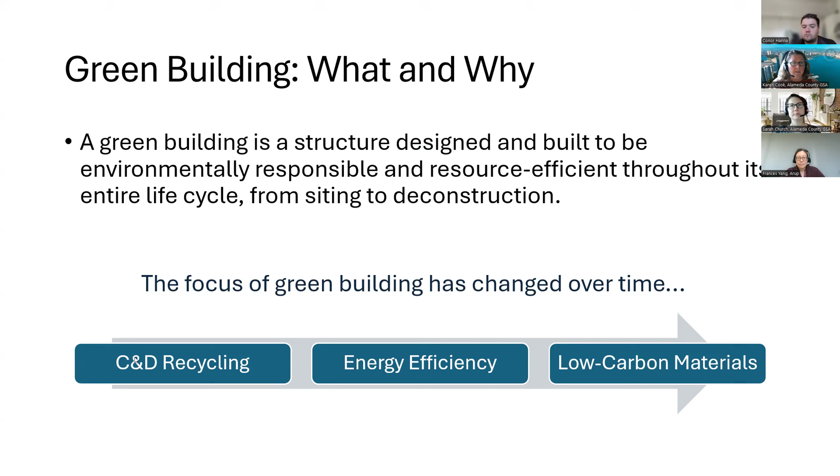We know that the green building industry is growing every year, and this is just one measure, but if we look at the number of projects being certified to LEED, which is a commonly used multi-attribute standard, we see it's growing year over year. We want to make sure the entire industry comes along with this work, and we hope that this supports you in doing that.

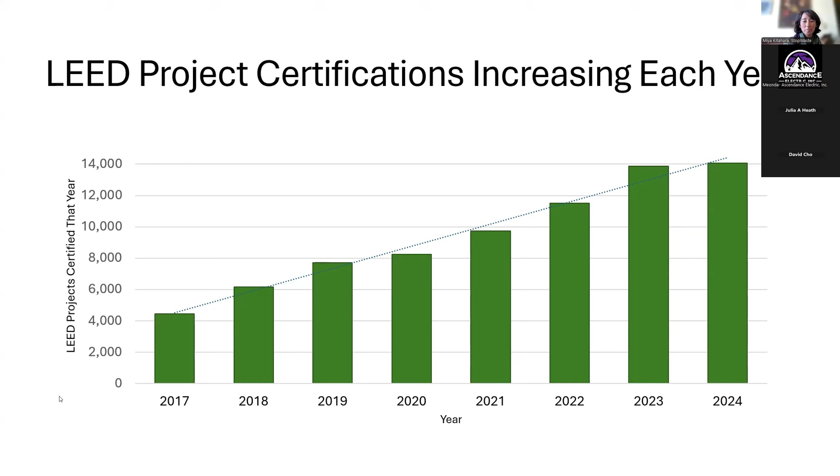As a government agency, it's really imperative that we act as leaders, as the impacts of climate change are harming our community, especially those that are most vulnerable. We've all experienced an increasing number of record high temperatures and record rainfall events in recent years, in addition to increased smoke pollution from wildfires nearby. These events not only affect our community, but they also may be affecting your business, your family, and your health.

Analysis from the Carbon Leadership Forum shows that building materials are a sizable part of the picture when it comes to contributing to climate change. Emissions from the building and infrastructure materials sectors comprise 17% of global greenhouse gas emissions.

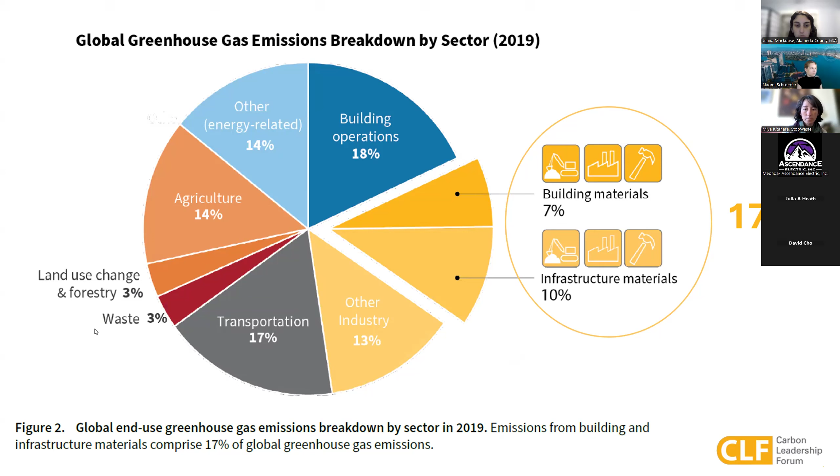In today's presentation, we're really going to focus on the low carbon material construction specification we're presenting, which addresses the emissions from the product and construction phase of the project.

But I do want to acknowledge that we're also working with Arup and StopWaste to draft a building material reuse specification that also addresses emissions from the same stages of the building life cycle. We're not going to cover that in today's presentation, but if this is of particular interest to you, please let us know, and we'd be happy to get your feedback on that as well.

So we are continuing in GSA to work on other projects that tackle energy efficiency, on-site renewables, and other green initiatives. But today's focus is really on these low carbon materials and getting your feedback so we can ensure we are meeting the needs of our local business community.

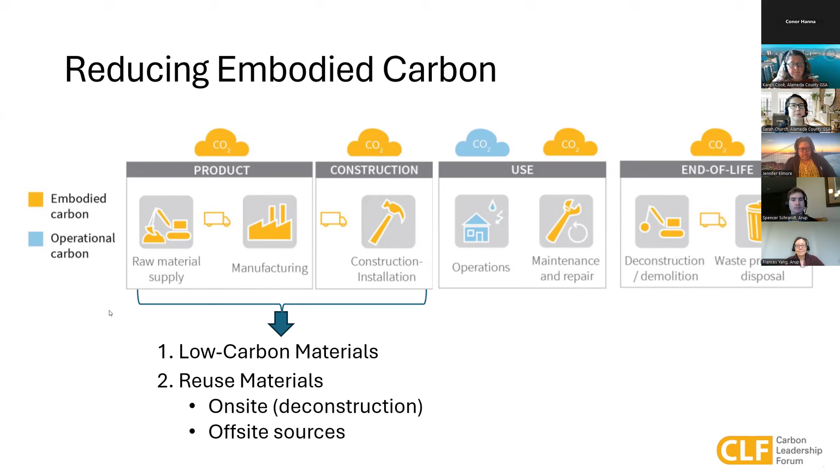Thank you, Karen, and thank you for joining everybody. Good morning. Yes, so I'm going to go into some of the more specifics with the low carbon materials performance specification, which would appear in the Division 1 specification, right alongside the more general sustainability requirements.

So you'll see asphalt, flat glass, and we'll clarify that a little more. CMU, concrete, both precast and cast-in-place. Different kinds of insulation, and these are categorized in their use, and we'll describe that a little more in terms of which types of insulation that really encompasses. And then sorts of steel products, as well as rebar.

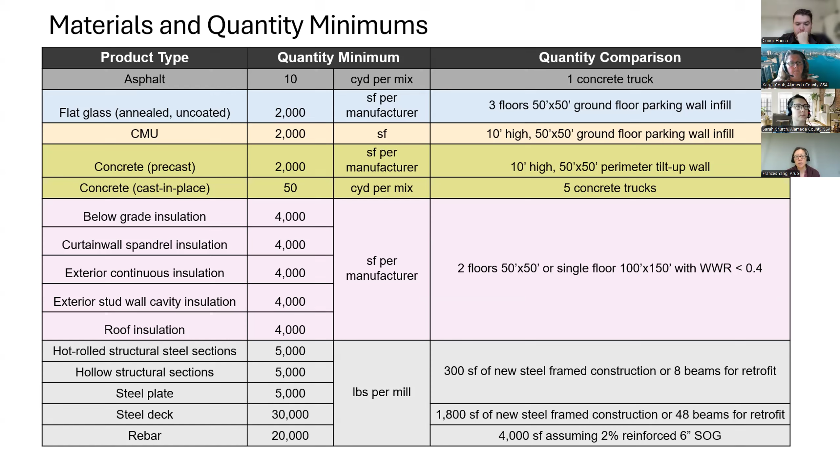Okay, so hope that gives you a sense first. We're also using this term global warming potential. This is when we're going to be talking about where we have additional limits on the embodied carbon of these building products. Global warming potential is a scientific term for embodied carbon, and it refers to the total greenhouse gas emissions that are associated with the production of a product. Well, it can also be associated with any greenhouse gases, but in this context, we're talking about the product and construction phases of a building life cycle.

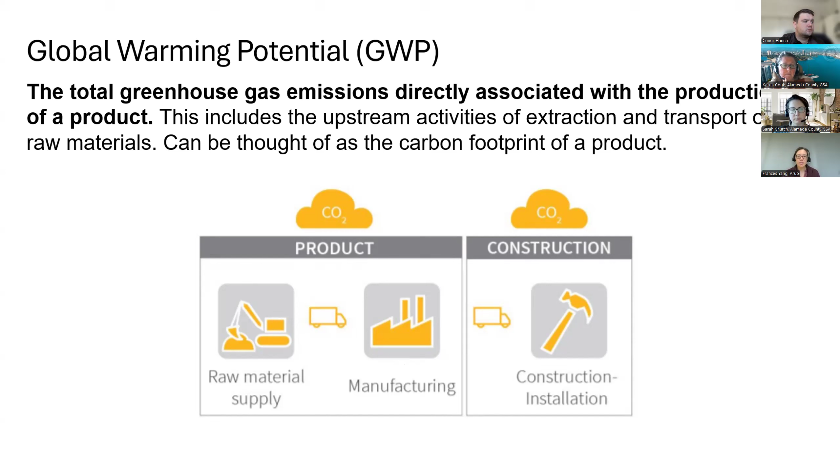So these are the upstream activities of extraction, transportation of raw materials, and the manufacturing and the processing, and then getting them to site as well. But in this case, it's really the product, and we'll be using a tool called environmental product declarations, which is just capturing the product emissions. Okay, next.

Just gonna go over product specific versus industry average. So these EPDs are generated from a life cycle assessment, which we'll call an LCA, which is a method of calculating and accounting for these impacts, considering the resources taken from the earth and energy used, and then the pollution that comes out of the process.

Product specific is where a manufacturer has done one of these for a specific product, whereas industry-wide is when usually the whole association for that type of product collects information from a whole bunch of its members and then produces an industry average, kind of representing a typical for that product.

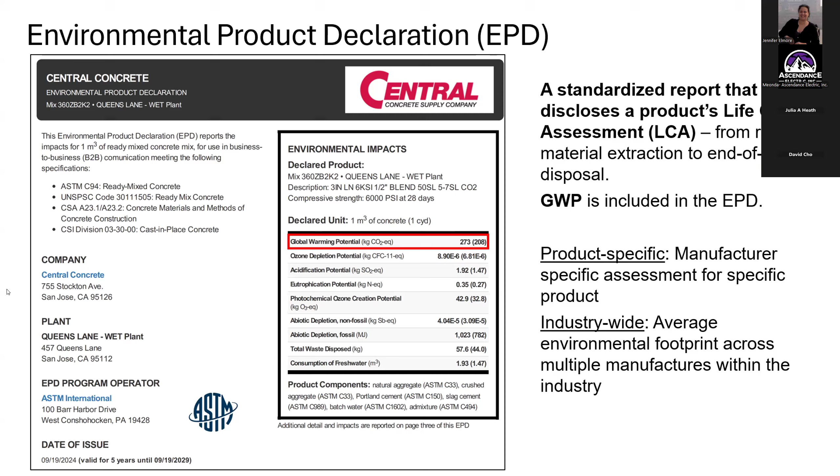So we are setting some global warming potential limits, and EPDs are what are used to disclose and verify your products are meeting the limits. Those would be submitted with the other kinds of submittals during the construction administration phase.

Also just to clarify, in coming up with these global warming potential limits, we were very conscious of four things in particular: aligning with state and local thresholds where we could, and we thought that was reasonable for Alameda County's types of projects; also aligning with LEED requirements; availability in the local marketplace, where we did a lot of analysis and counts; and then preparing for future REACH codes, trying to keep an eye on how quickly we need to be decarbonizing the products in our buildings.

So here are the limits now. You'll see that there are two materials that actually don't have limits yet, the asphalt and precast, and we felt that was because the important thing to do right now is to just be collecting the environmental product declarations for these products. Their industry benchmarks are not granular enough or differentiating enough to really help us with setting limits, we thought. So right now we're kind of in data collection mode for those.

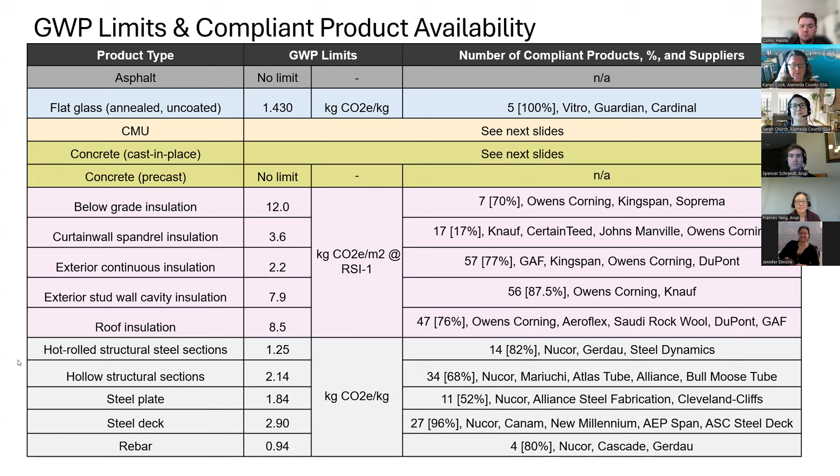So this is an example of the kind of analysis we did, looking at the EPDs available and the global warming potential limits reported on them. This is just for 3 manufacturers that we know of, comparing that to the industry average from the National Glass Association. For glass, we set the limit to align with that national average. Any manufacturers that were part of the reporting for that industry average are listed either in the EPD itself or on the website where you'd find the EPD, and that would count as well. We know there are others who make glass and even have product-specific data, so there could be more compliant products, or maybe some non-compliant ones that just aren't shown in that database.

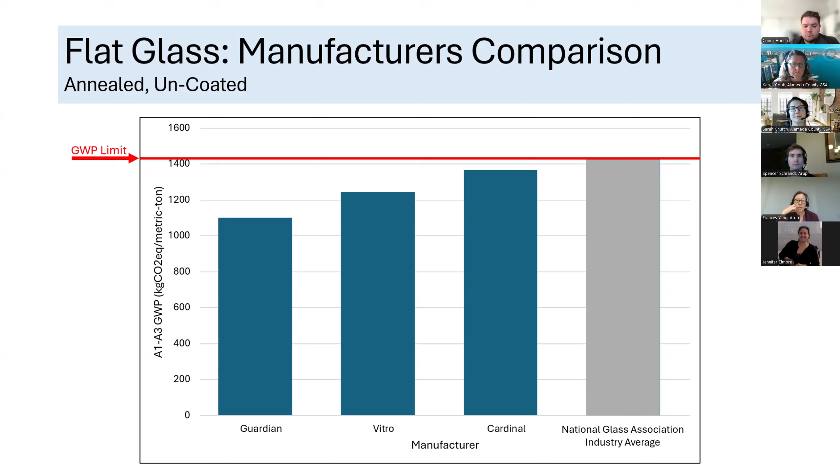For concrete, it's a little more nuanced with the national industry average EPD. The global warming potential is actually reported by strength, and there's also a division between normal weight concrete and lightweight concrete. These limits are aligned with the ones adopted by Marin County, and they are generally 10% to 30% lower than the national average. Developing these limits involved an enormous study and stakeholder process with the 3 suppliers that supply most of the concrete in the Bay Area, and there's an enormous amount of EPDs from them as well. There are so many variations of concrete mixes, but that gives an idea, in that database, of how many you can find and the likelihood of compliance.

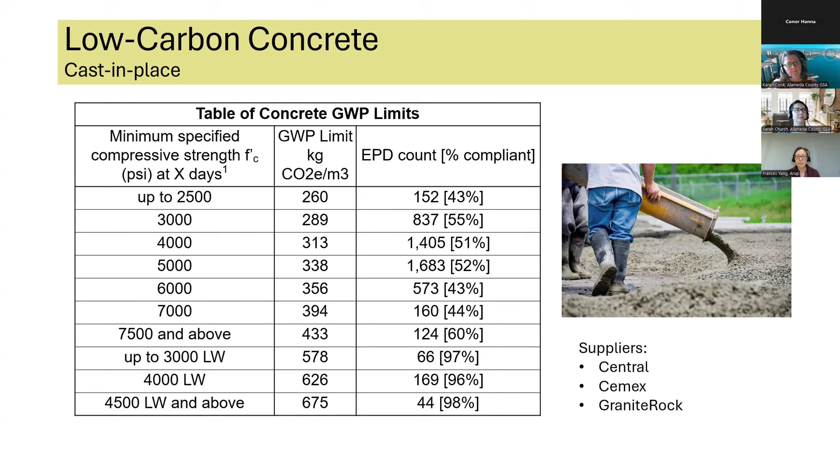With CMU, we wanted to explain how we recognize that CMU has two major components, the block and the grout. So there's a limit for the assembly, and a calculation needs to be done considering the global warming potential of the two separate products, coming together in the proportion reflected in the compliance form provided. There's an automatic calculation to do this, but you need to know the percent of grout, the global warming potential of the block and grout, or even the cement content of the block and the grout.

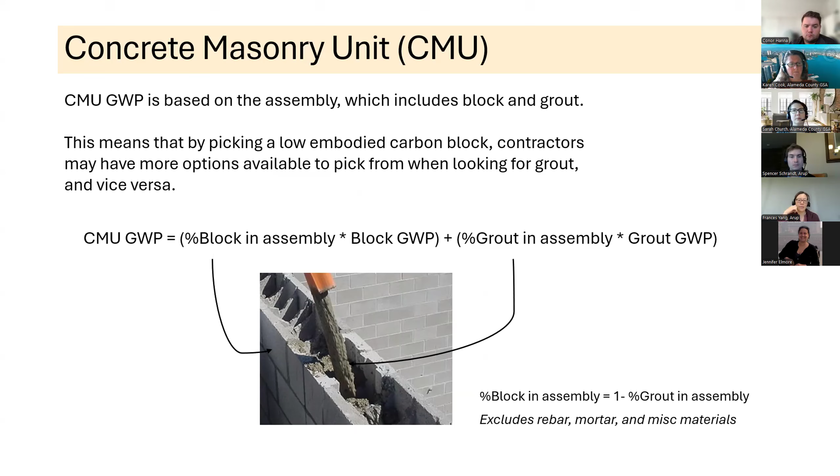Lastly, for insulation, we took an approach of thinking about it in 5 categories of use: roof insulation, exterior continuous insulation, exterior stud wall cavities, curtain wall spandrels, and below grade. We recognize that you can't use any insulation for any given use—there are specific types necessary or most fitting for either compressive strength, or for getting water out without degrading the thermal resistivity due to water.

Our facades team helped with identifying which products are actually options for these categories, and then we used the industry average numbers for those to come up with the limit. We were also quite conservative, as there are some really low GWP options, but we know they're not used in a widespread way yet, like timber board and loose fill timber. So we show them as options here—they would definitely comply, but we didn't factor them into the calculation of the limits. We added one more buffer on top of that, giving another 25% allowance, because we realize this is a newer product to introduce with limits to buildings.

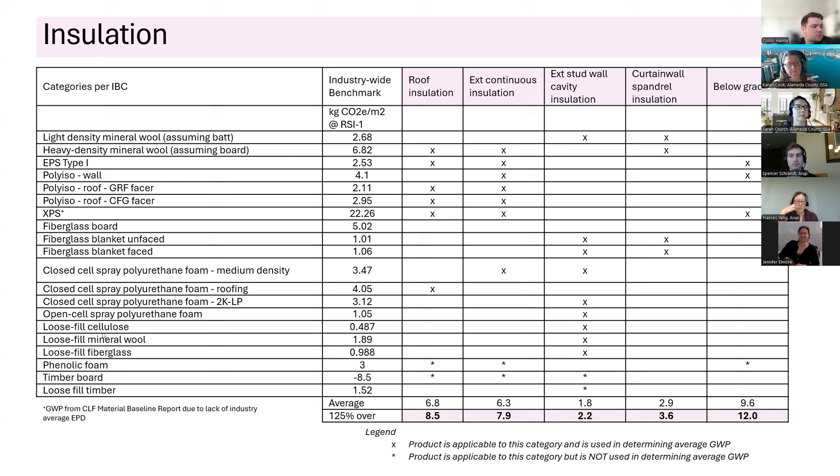Okay, so I'm going to turn it over to Spencer, who will explain some of the compliance forms.

Thank you, Frances, that's great background. To start, I'll talk a little about the timeline for how this all goes down. We have a compliance form, and that template will be provided in the RFP by the county. It looks similar to what we see in the screenshot below—what's shown here is the form for concrete, and this form would be completed at multiple stages throughout the project. At 90% SD, there's really just a checkbox that says here are the materials I expect to exceed the quantity minimums that Frances was talking about earlier, and acknowledging that for each of those materials you will be in compliance with the GWP limits. At 90% DD and 90% CD, the design builder would update and complete the preliminary compliance check, which is the left half of this form, with their expected quantities and materials and GWP from the product EPD.

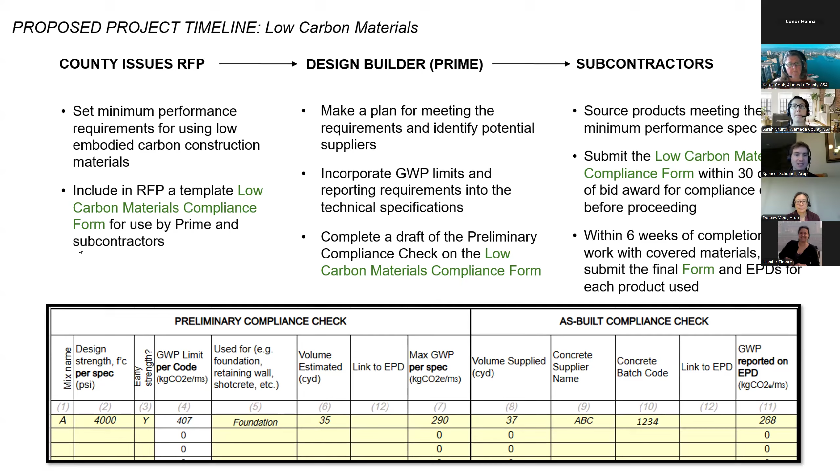This next slide shows that same thing. I don't think we have enough time to go through what that form looks like, but this is pretty much what it looks like for each of the materials, and there's a different sheet in the form for each of the materials that Frances was talking about beforehand.

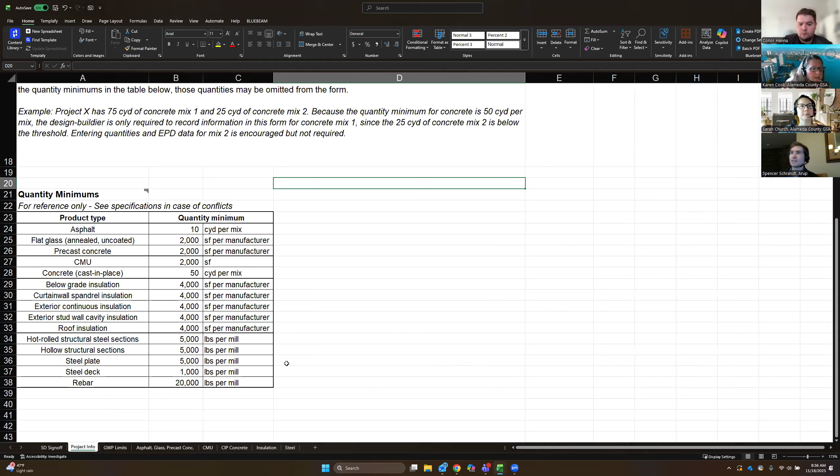Maybe this would be a good time to launch a poll for the folks in the room who are supplying these products - are you mostly doing projects that meet these quantity minimums? Sarah, do you want to run through the poll questions?

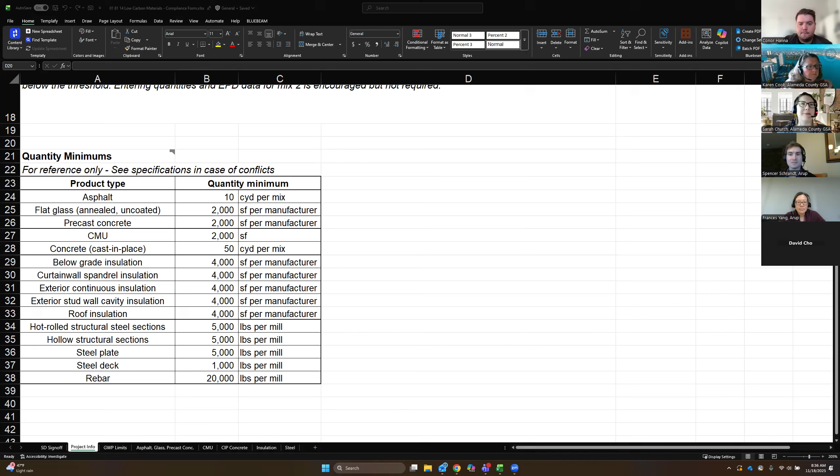There it is. Are you seeing the poll now? Yes. Great, so taking a look at, if you can get even bigger, Spencer, I know it's probably giant on your screen but tiny for us. Wonderful.

So if you think about the projects that you do, do they meet these quantity thresholds? Are they smaller or bigger? People are answering - we have some saying that all meet the quantity minimum and some do not know.

Great, really helpful to have these answers. We're going to wait for another moment to see if we get any more responses on the line.

Great, you can see the quantities there. Okay, great, I'm going to end the poll. Just a moment, one last minute. Okay, here we go. And so you can see the results here - not everyone is aware how many of the projects would meet the quantity thresholds, but for some it's all.

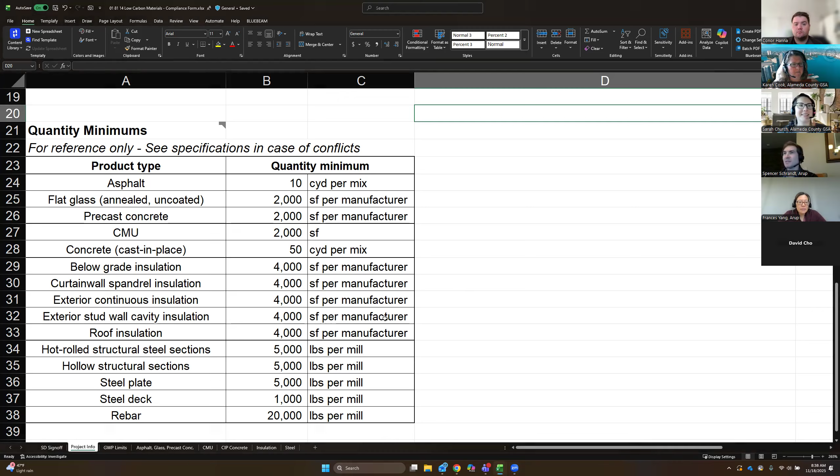Thanks for jumping in with that. This is a great time to look at that. I'm wondering if anyone's willing to put in the chat if there's anything we could do to help - or is the nature of not knowing just not being able to know off the top of your head? You'd have to go back through past projects to look at it, or is there some other kind of barrier to not being sure? If anyone wants to help us understand that more in the chat.

That's a great dovetail as well into our next question, so feel free to answer in the chat - is there anything we could do to help you understand that? As you think about that, what do you think if we go to our first question for the group, because this seems to be related?

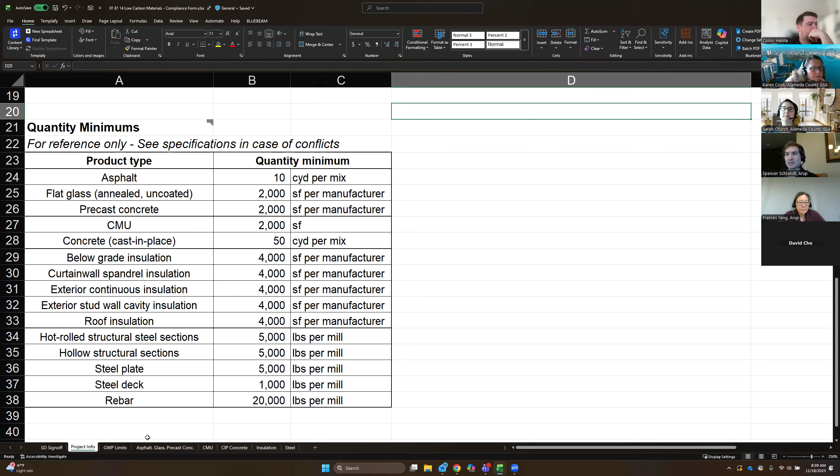Is there something else you wanted to do before we get there? Let's just let Spencer have one more moment with this sheet, and then we'll move to our discussion questions. Yep, sure.

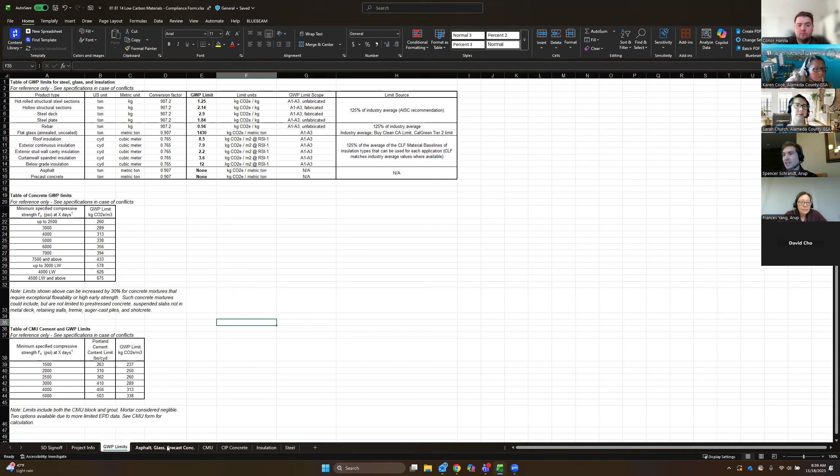This GWP limits is not any new information either - this is merely for reference and is also all located in the specs, low carbon material specs. And then really these 5 tabs here are where all of the work is really going to be done.

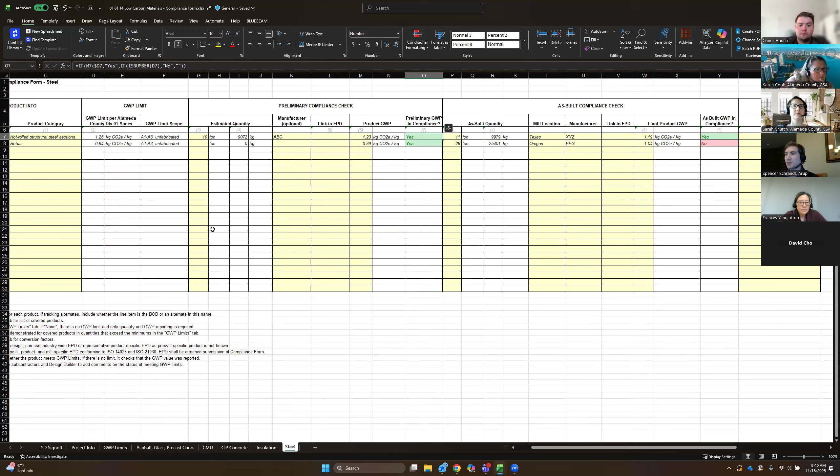Let's take a look at steel, since it's pretty typical for most of the materials. I'll zoom in and we can pan left to right. All these yellow highlighted cells are for the user to input, so they could have a product name, product category, and all these white cells are auto-calculated based on the product category and other user inputs. They would then input the estimated quantity and manufacturer information if available, and link to the EPD and product GWP.

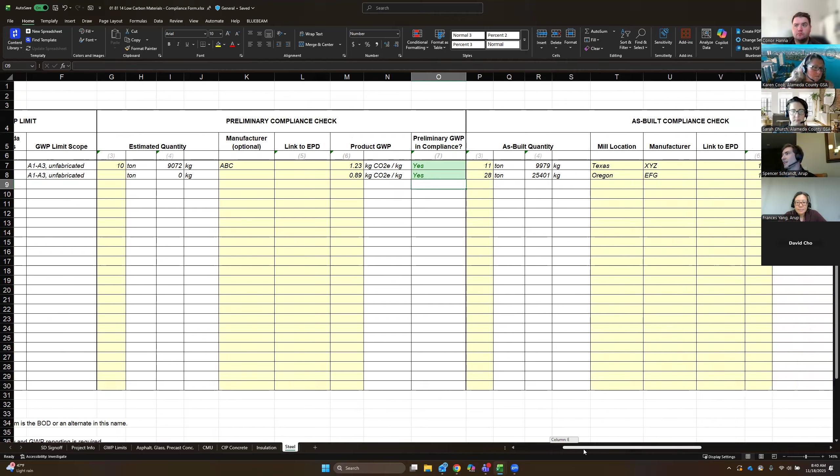Then there's this calculation which checks if that is in compliance with the specs or maybe not. As I mentioned before, the preliminary compliance check and the as-built compliance check, quantities do not have to be, or GWP values do not have to be identical. This is more for us to track how quantities are changing throughout the phase of the project and through construction.

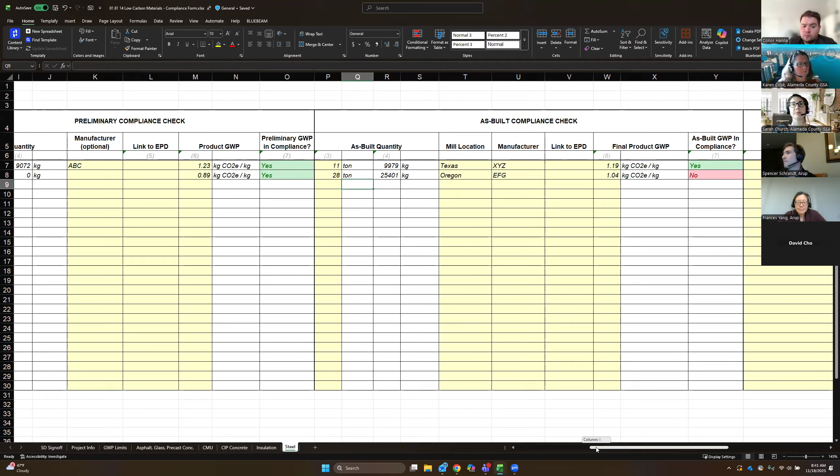And for all of these columns where we have a number in parentheses, we have notes for clarification on either what the calculation is doing or what needs to be filled in by the user.

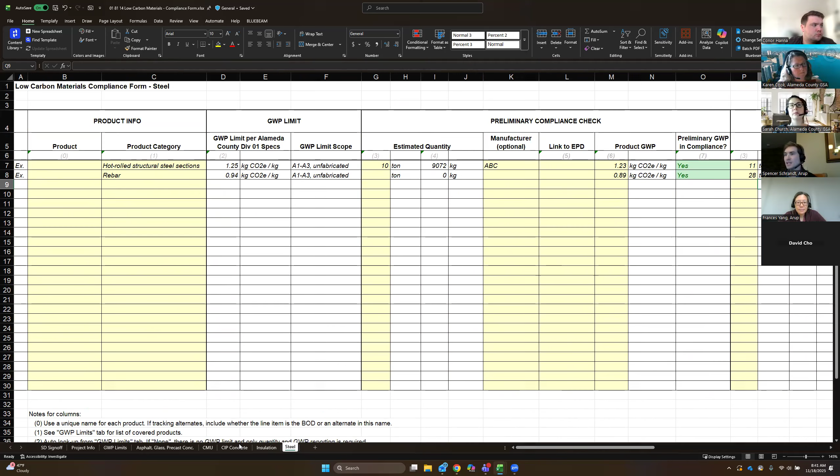The two that I'll talk about a little bit differently are CMU and cast-in-place concrete, where you do have the option to meet the GWP limit for each mix, but there's also an option where maybe you're a little bit higher on one mix but then lower on other mixes, as long as the total GWP of all concrete expected on the project comes out to be a smaller global warming potential than the allowable total GWP based on the quantities and strengths that you have.

And I think that's all explained pretty well in the specifications too.

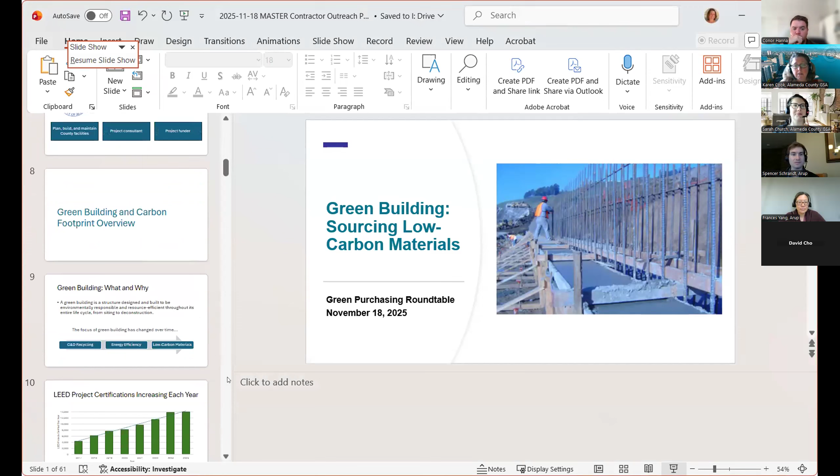So we are going to go to a few questions now, and I can share my screen again. I'm going to come down to the... there we go.

That's great, thanks Karen. So this is the time when we get to hear from all of you. As Karen mentioned, we are really interested to hear what barriers might come up or how does this hit you. We want to know when you go out to source low carbon materials, or you might be interested to do so in fulfillment of a contract or a relationship with a prime contractor, what barriers would you encounter, do you think? What information would you need, and what more do you need to know to compete successfully as a subcontractor for projects? We're really glad we got to have this event to speak to you specifically and hear about any barriers you might have.

As we've mentioned, the specification is still in progress. It's in draft form, so we can make changes reflecting the needs of all the people who will be using it, all the businesses that will be wanting to meet this standard. So I'll open the floor. Please feel free to answer in the chat or speak up and unmute yourself. The floor is yours.